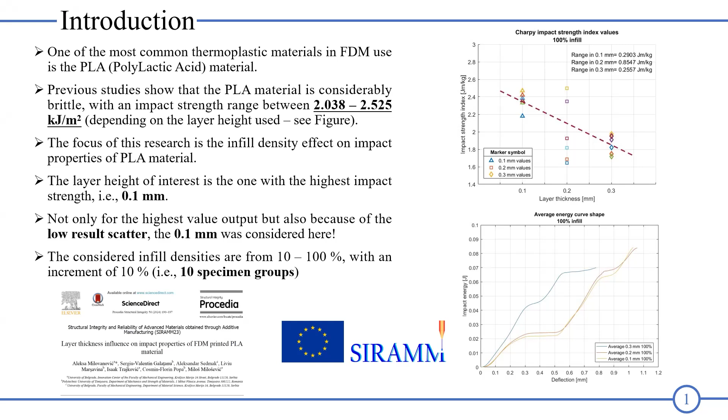Here are some charts regarding the previous research. We now show the results of the best layer height presented in one previous paper. We'll show 10 different infill groups from 10 to 100% with a 10% increment. So all in all, 10 test groups on a 0.1 millimeter layer height.

The tests were performed on an instrumented pendulum with the hammer having a potential energy of 5 joules, capable of testing polymer materials. Impact speed is 2.9 meters per second and starting angle 150 degrees, all as suggested by the appropriate ISO 179 standard. The instrumented pendulum used here is from the Instron manufacturer. This was conducted in Timișoara with the cooperation of our Romanian colleagues.

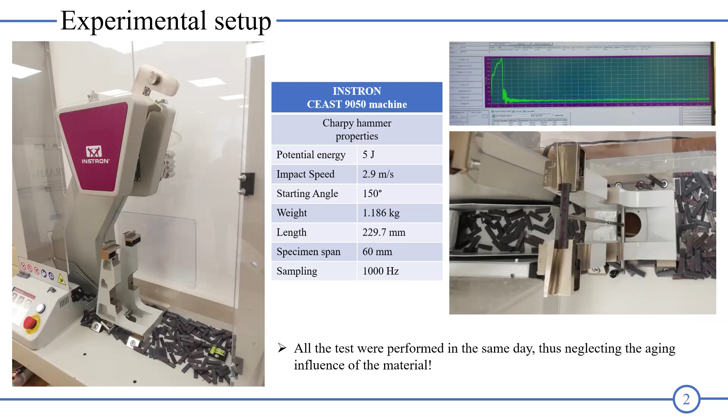And this is how the specimens look. Every test group has 7 specimens. 5 is mandatory by standard, and we add 2 for replacements, but all the results will be shown because of the good repeatability between the specimens. We used type A notch. This is interesting to emphasize. The cross-section of this specimen at the notch location is 4 by 8 millimeters.

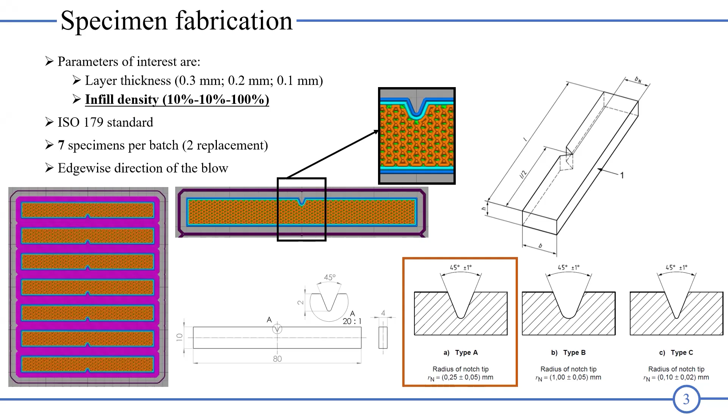So we have different layer heights and different infill densities. This is how, from slicer software, the layout of such specimens look, from 100 to 10%. The infill pattern in these specimens is honeycomb, so hexagonal elements are inside the specimen. We used 2 outlines which envelop this infill.

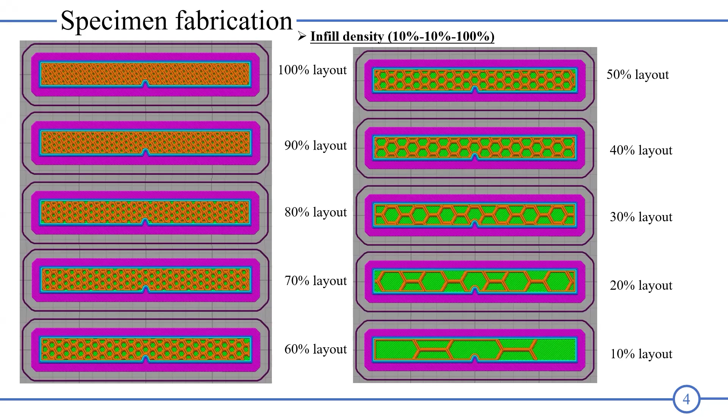And here are the initial results. These are load deflection data from 100 up to 10%. The repeatability is quite good. These polymer specimens have at least 3 peaks in the load deflection response, and between these specimens, all the peaks resemble. They all look alike in the higher infill densities. If we look from 100 down to 10%, this repeatability is sufficient until 50%. With 40% specimens, we have some differences in later peaks. Still the first one looks very similar in all the specimens, but the other peaks have some differences.

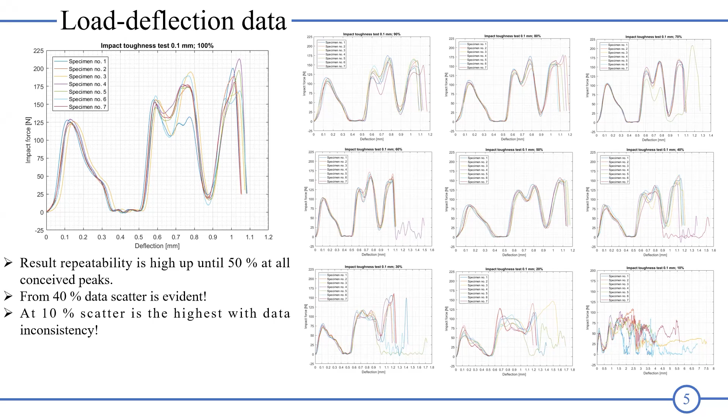Another thing to emphasize, all the specimens broke in about 1 millimeter of deflection. There was one test group which could last for 8 millimeters. We'll show the reason later. Here are the energy deflection data. The results have similar conclusions as in the load deflection response. The plateau, as you can see here, where energy is constant at the change of deflection, and all other features from the charts resemble up until 50%. Starting from 40%, these results start to differ, with the 10% having the most difference of them all.

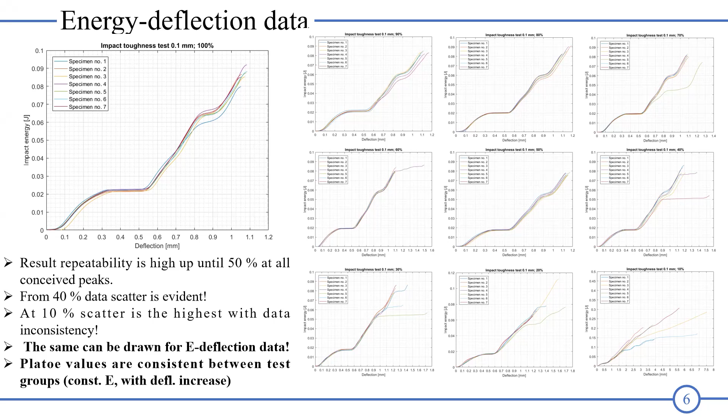Here are the average curves. This was performed in MATLAB. We averaged the results to place them on one chart and to show you the differences between infill densities. The higher the infill densities, the higher the peaks are. The same goes with the impact energy deflection chart. Higher energies are, as expected, present in full infill density specimens, and the response decreases with lower infill density.

Here are two pictures of the layout emphasizing the cross section of the specimen. You see, even if it has 10% infill, the specimen still has these outlines around it, which actually are the only thing tested on these specimens, and still there is some response in the test.

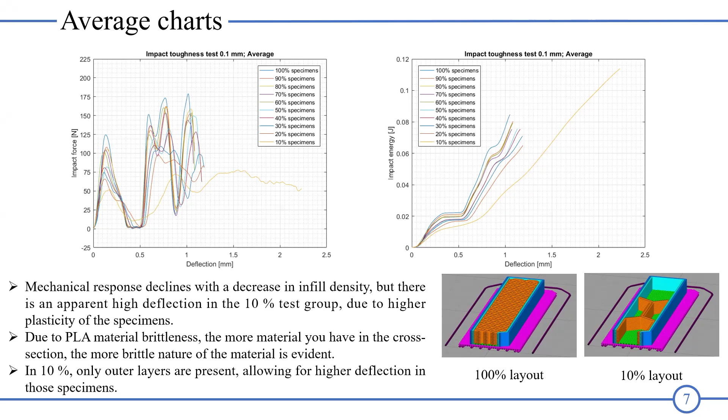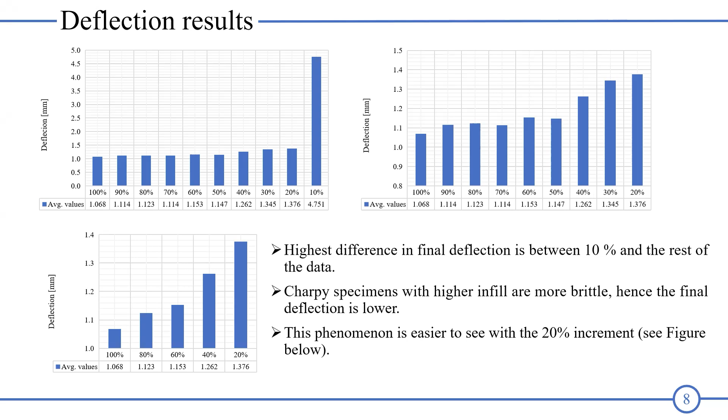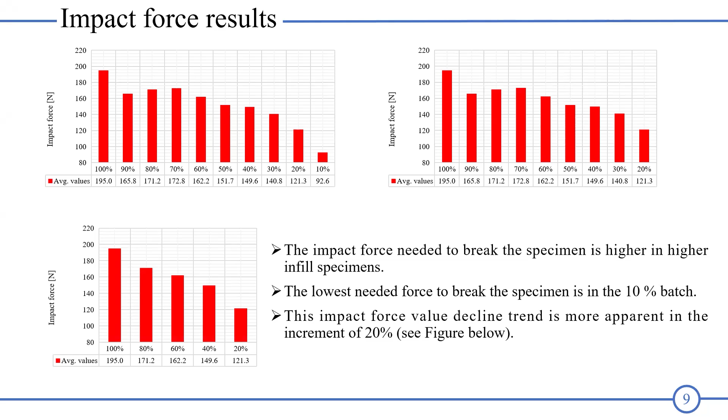Now the force results: also 10% is quite different, so we are neglecting it from further analysis, and the results can be seen better on the chart, having just these 5 test groups. From 100 to 20, we see how the impact force is quite smaller with lower infill densities. And impact energy: because the deflection was high, but due to error, not due to material properties, 10% had higher impact energy. During this whole 4.8 millimeters of movement of the hammer, it detected some energy, and this is due to a flaw. So we are neglecting the 10% result.

Also on the smaller chart down, we see that impact energy decreases from 100 to about 30%, and there is this phenomenon where this energy recovers from 20%, probably due to the same error which is very visible in the 10% group.

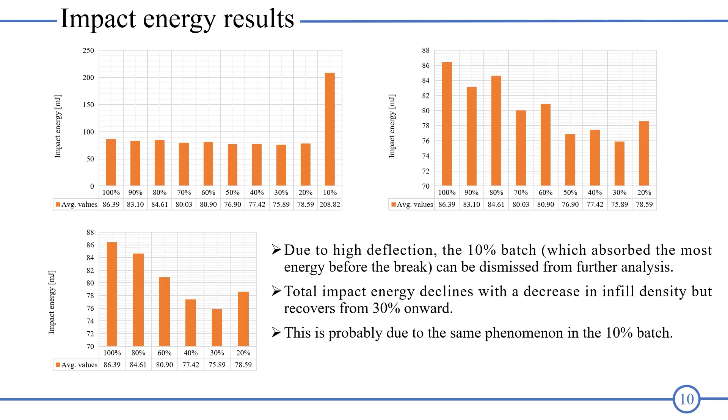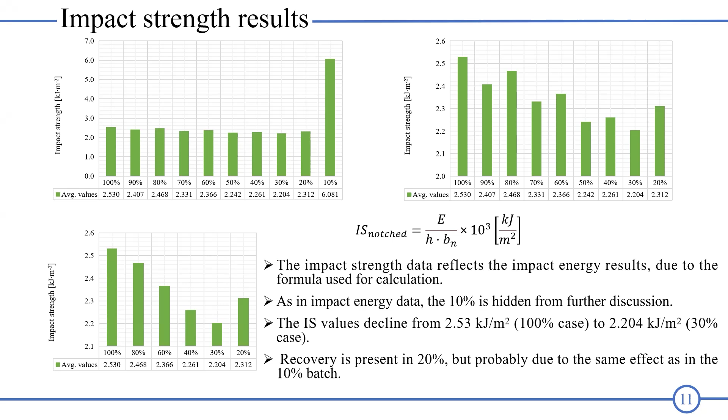And last, the impact strength, actually the only representative result in impact toughness tests. We see the impact strength results with all of these 10 test groups. Because the impact energy is embedded in the formula for impact strength calculation, we see a similar chart, showing that impact strength decreases with lower infill densities from 100 to about 30%, and there is some recovery with the 30 to 20% specimens. So the suggestion is probably to avoid showing this 20% result, because this recovery is probably due to the same error present in the 10% infill batch.

And just to conclude, here are the layouts of all 10 test groups. Further research should include the impact of these outer layers, because we use the standard specimens. There is only one geometry available, but still, if you test FDM polymers with a standard more dedicated to molded plastics or some different conventional method, you see here that even though we tested 10%, where you don't expect high results, there is still some response because of these outer layers. As I mentioned, the cross section is 8 by 4 millimeters, and this outer layer is around 1 millimeter thick.

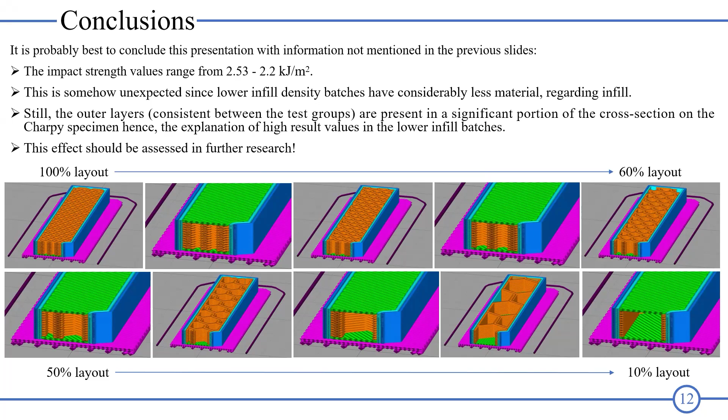So it's quite strange to actually state that your 30% infill specimen has around 2.2 kilojoules per meter square, and the highest possible full infill is around 2.5, which is maybe 10-15% greater, just because of this influence of the outer layers. So further research should include bigger specimens with the same outer layer thickness, just to actually have proper results. So this is all.